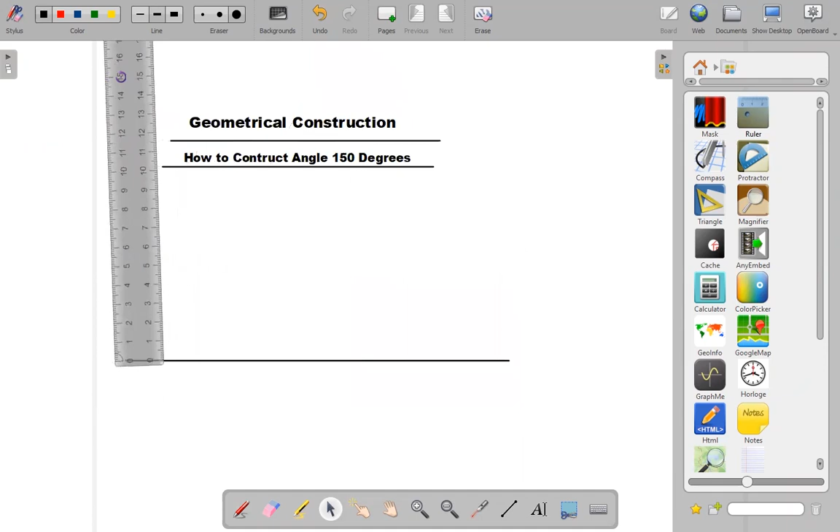First of all, we rule a straight line. Then on this straight line, we make a reference point, which is where we want the 150 degree to be. So with my ruler, I'm going to make a reference on this line.

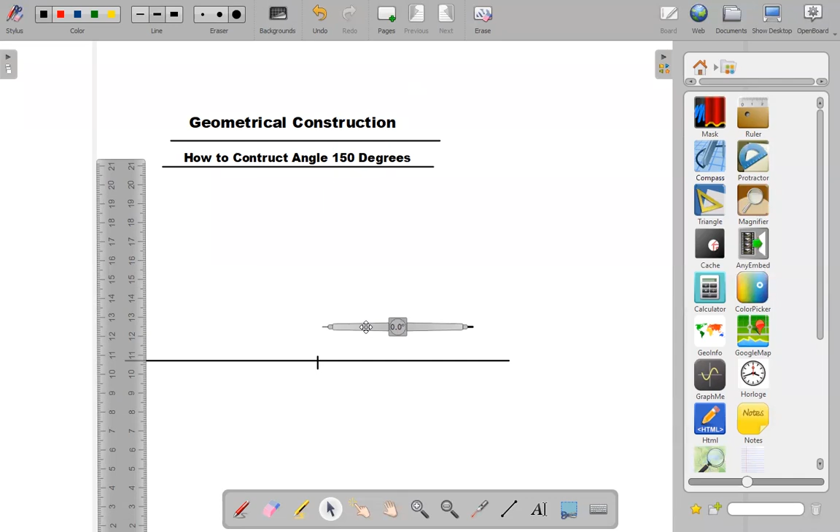Now with the steel point of the compass on that reference - I'm using a digital compass here. If you're using a real compass, the arm opens and closes like scissors, whereas mine is more of a straight line. When I say steel point, I mean the metallic point of the compass, while the pencil point is the part where you have the real pencil. So with the steel point placed on the reference line, let me turn the compass so you can have a clearer view.

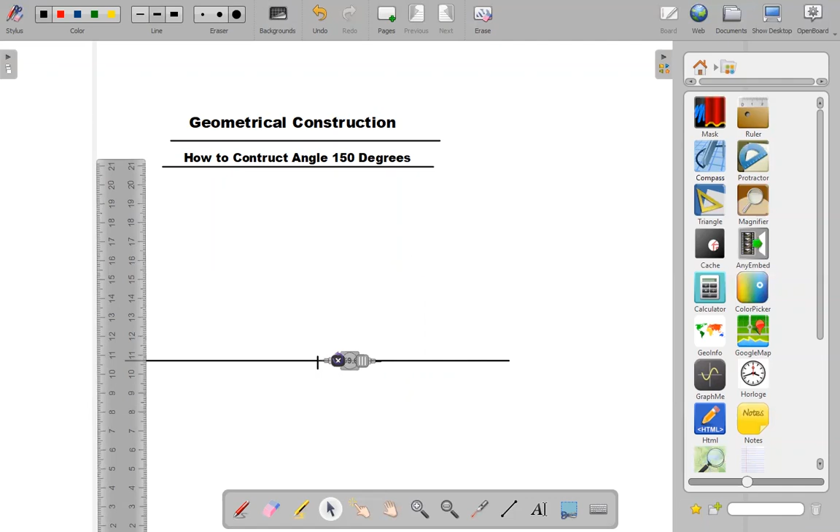We're going to make an arc. Now I'm decreasing my compass here. In your own case, you need to open it since the compass in its natural state is closed. So you open the pencil point to a convenient radius, then place the pencil point on the line we drew earlier, this horizontal line, and make an arc like this.

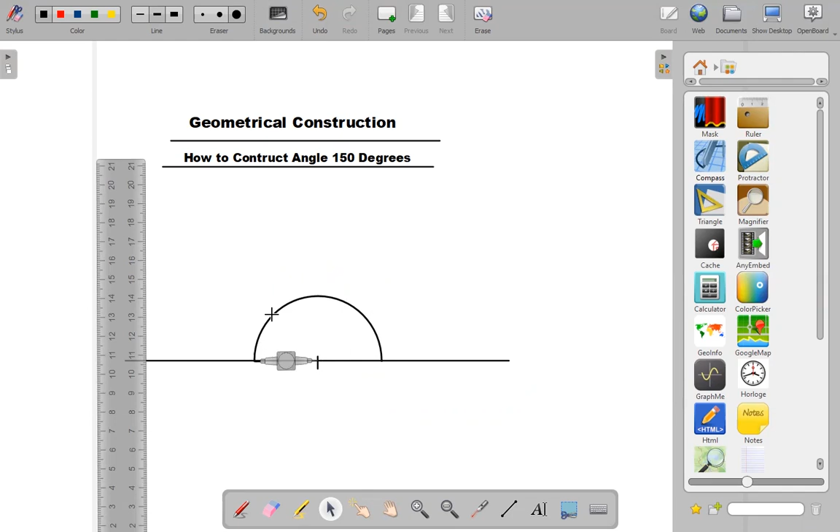This arc that we made is, of course, 180 degrees, the angle on a straight line. Now with the same radius used in making this arc, we take the steel point of the compass to this point where the arc meets the line, place it there, and let me shift it so I can have a clearer view.

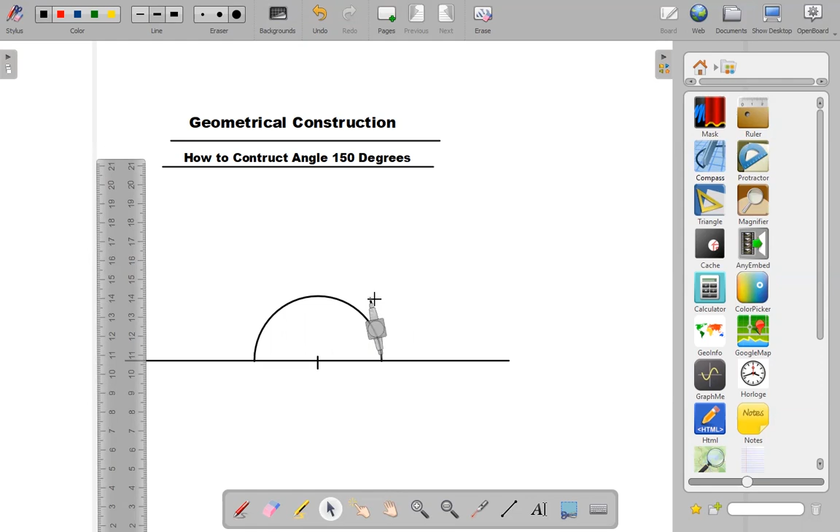I'm going to divide this arc using this same compass. Make sure you do not close or open your compass - use the same radius from making this arc to cut it into three divisions. This cut, if I join a line to it, gives me 60 degrees. Another cut with the same radius gives another 60 degrees, and the remaining one will also be 60 degrees.

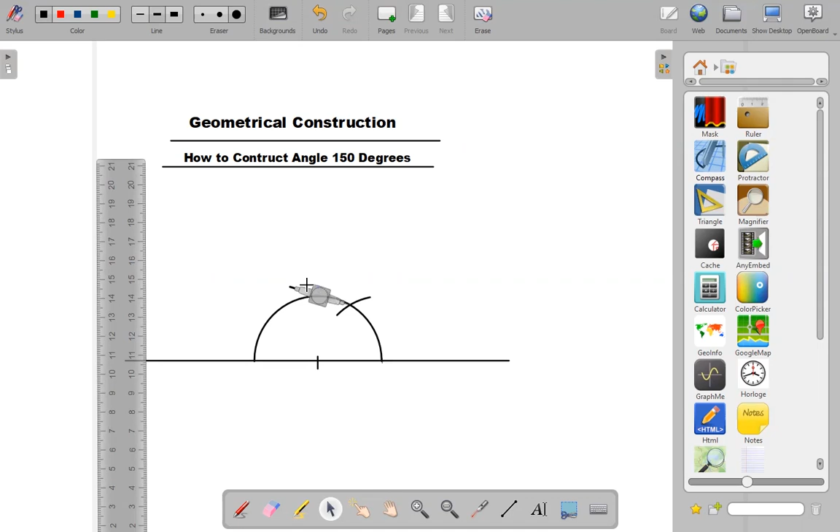Let's do that. I'll place the steel point here now where these two arcs meet, and make another arc on this line - that is another 60. So 60, 60, 60. Of course, 60 times 3 is 180, which is the angle in a straight line.

Now we want to construct angle 150. If I add this 60 to this 60, that is 120. Therefore, to get 150, I will just bisect this remaining 60. When you bisect 60, it gives you 30. So 30 plus 120 gives us the 150 that we need.

So place the steel point here to bisect this remaining 60. Then we can extend the pencil point this time so the arc I want to make can easily cut. We'll make an arc here to bisect this 60 degree. Make an arc, then take the steel point to this place and cut this previous arc.

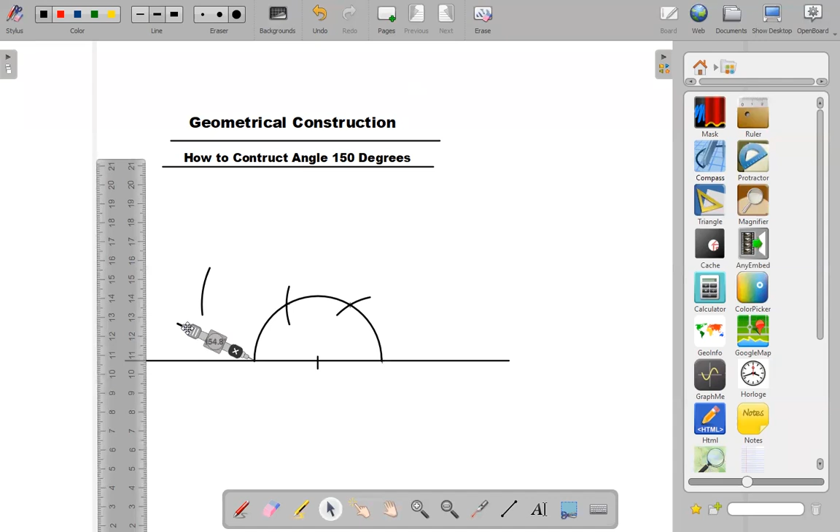Now that we've cut the arc, we can join that point to this reference point. With a ruler, we join that point - the point of intersection of this arc - to this reference line. And that is it right there.

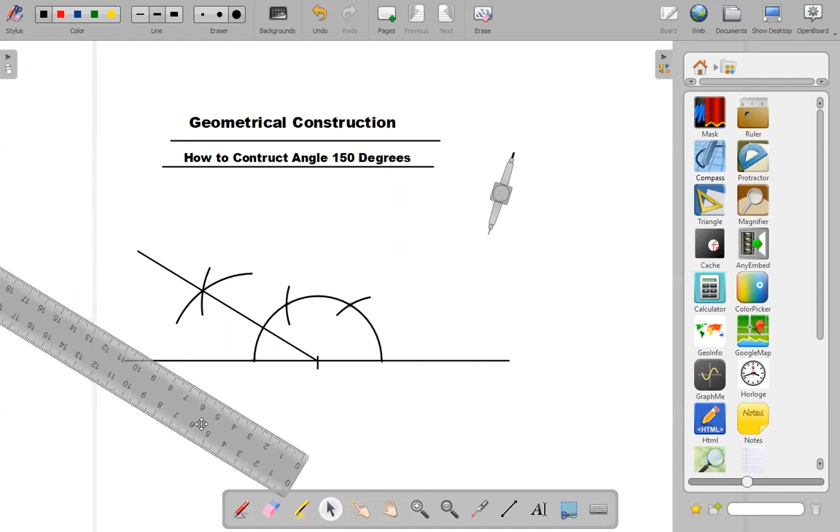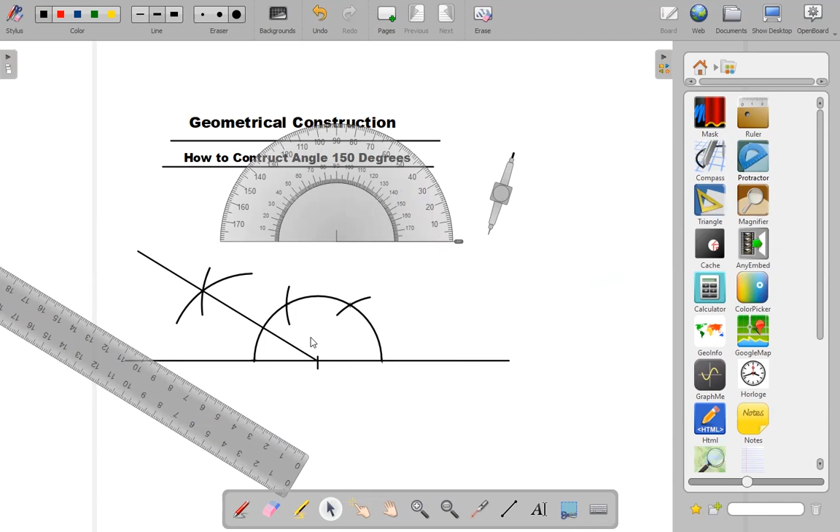To confirm it, we use a protractor to measure whether we actually have 150 degrees. To use a protractor, this baseline on the protractor must rest on our reference line, and this vertical line on the protractor must also rest on this vertical line. Then we measure - you can see it there. That is 150 degrees.